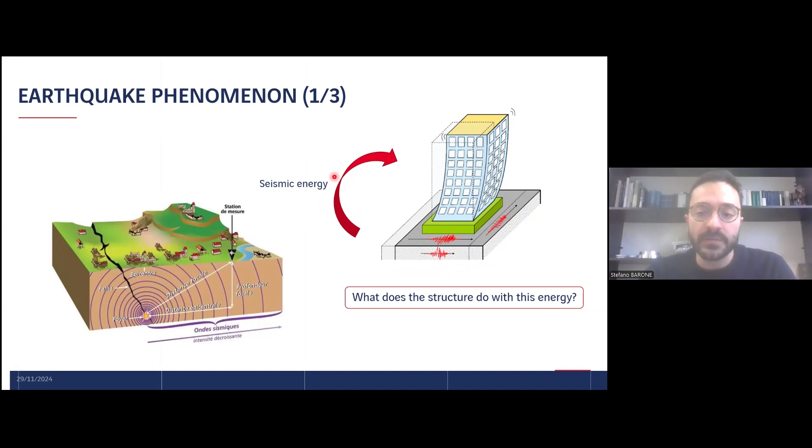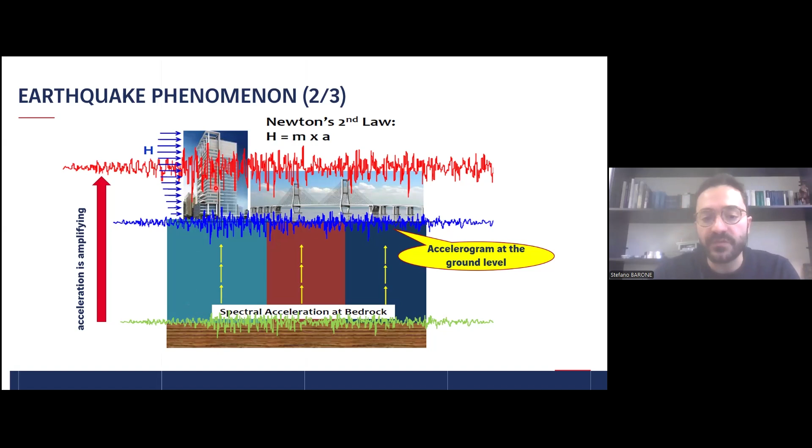Then, if we have a building or a structure that is fixed on the ground, this will be shaken by the earthquake, that is, in this case, the blue line. During the shaking, the seismic acceleration at the ground is amplified along the height of the building, along the height of the structure, as you can see here in the red line. So we move from the green signal to the red signal, and this is because typically the structure amplifies the seismic acceleration if it has a frequency or period of vibration that is close to the frequency content of the earthquake. So in the end, we have a sort of resonance phenomenon.

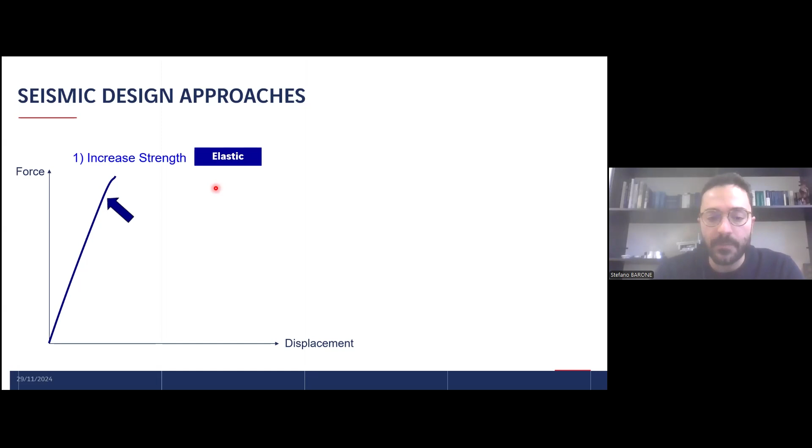The first seismic design approach is to design the structure to behave completely elastic. So the concept of this design strategy is to increase the strength of the structure as much as possible so that during the design earthquake, the structure will behave completely elastic. And so this is the elastic approach. Then we have the second approach, that is the elastoplastic approach, that is nowadays the most used method if we are in a medium to high seismic region, like, for example, Costa Rica. This is called the elastoplastic method.

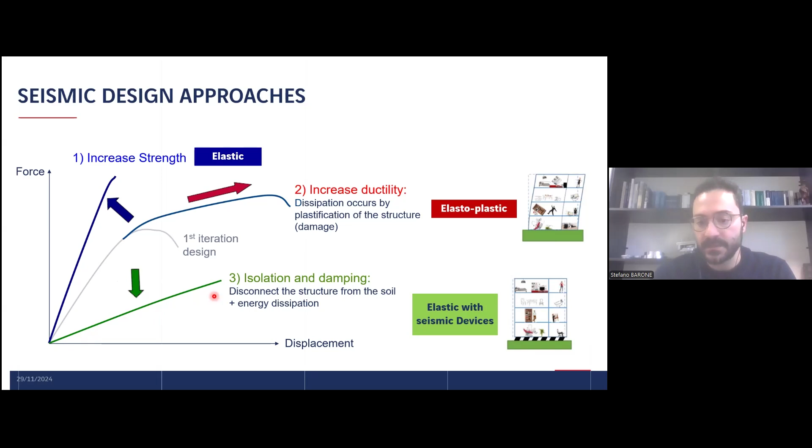And the second is that we can have the advantage of the elastic design. What does it mean? It means that the structure during the design earthquake will behave completely elastic. So this means no damage during a seismic event. So now we will go a bit more in detail into each design strategy before reaching seismic isolation and dissipation. So elastic design, as I mentioned, is the first design approach.

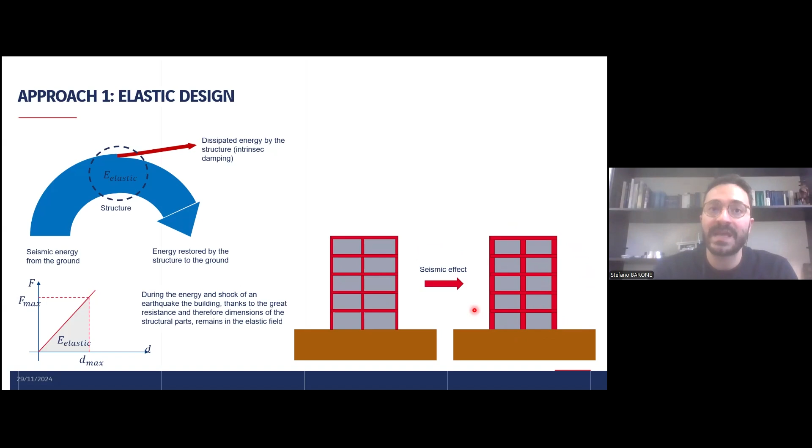And as I mentioned before, if we take a look at the lateral force displacement response, the structure will behave completely elastic. So what happens? For example, here we can see that if this is the building, designed just for gravity load, and we apply a seismic action, this is typically the effect of the application of an earthquake. So we need to increase, as I mentioned before, the strength and the dimensions of the structural elements in order to resist the seismic action elastically, without any damage.

So if we go to the main characteristics of this design strategy, first of all, the elastic design requires an important reinforcement of the structure, big structural components. Of course, this is a function of the type of structure and of the seismic zone. You can understand that the higher the seismicity, the higher will be the strength increment of all the structural elements.

The second characteristic of this strategy is that the structure is elastic during an earthquake. So this means that during an earthquake, we don't have any damage. The third characteristic, which is linked to the first point, is that typically an elastic structure requires a high initial manufacturing cost, because we need to increase the strength of the elements. If it is a reinforced concrete structure, we need to increase the quantity of reinforcement and so on. Of course, this is again a function of the type of structure and the seismicity.

So the question, after having analyzed the elastic design, is how we can reduce the size of the structural components and how we can reduce the initial construction cost, because these two seem to be the critical points of the elastic design. And that's why, for many years, we have had the ductile design.

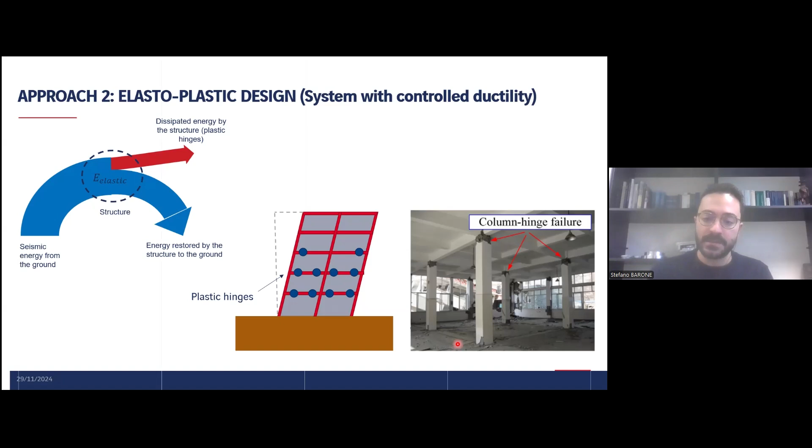So if we go to the main characteristics of this design strategy, first of all, thanks to the dissipation of the seismic energy, we can reduce the design seismic force to be applied on the structure. And this is the reason why, thanks to the ductile design, and it is the first point, we can reduce the dimension of the structural components with respect to the elastic design. So we have solved the first critical point of the elastic design, reducing the initial manufacturing cost of the structure. The second point is that during an earthquake, we have dissipation of seismic energy.

So we allow structural damage, and I would say also non-structural damage. As a consequence of this point, a ductile system typically is not serviceable after a seismic event. It cannot be used because you can understand here that we have damage. So before using the building after an earthquake, we need to retrofit the structure. And consequently, we have to take into account all the repairing costs of the structural and non-structural elements.

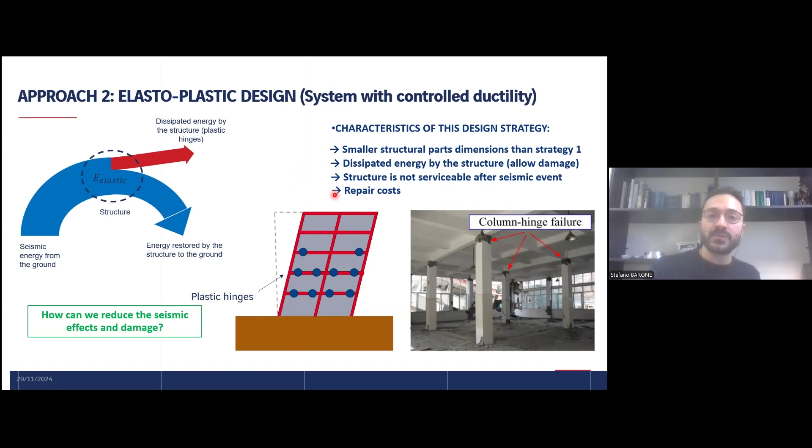So now, having analyzed a ductile system, the new question is how we can reduce the damage, so how we can reduce the seismic effects on the structure. And this is the reason why nowadays, I would say now it's more than 40-50 years, we can use this technology. Here we have the third design strategy, the one with seismic devices.

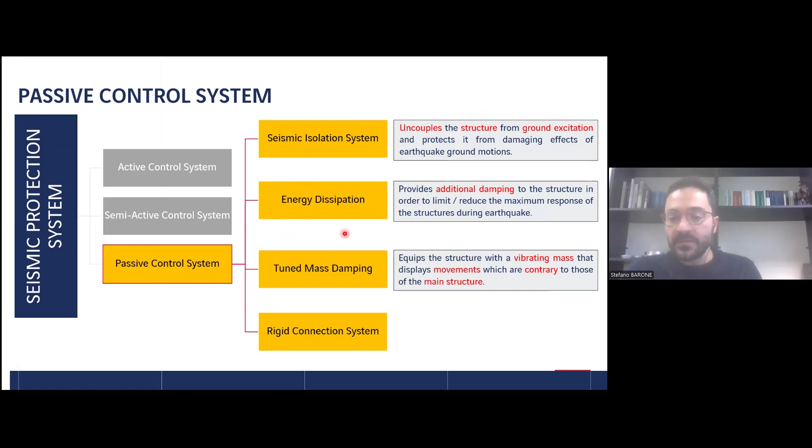Depending on the standard that you use, but typically for each family of product, for each system, you will find a description. For example, what is a seismic isolation system? It is a system that uncouples the structure from the ground excitation and protects it from the damaging effects of earthquake ground motion. What is an energy dissipator? An energy dissipator provides additional damping to the structure in order to reduce the maximum response of the structure during an earthquake. Then we have the tuned mass dampers, which are essentially masses installed in the structure to vibrate with a contrary movement with respect to that of the structure, like, for example, the mass that is installed on the top of the

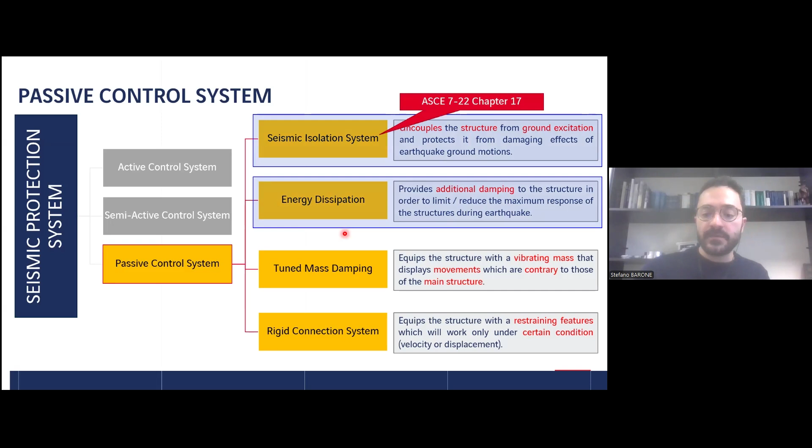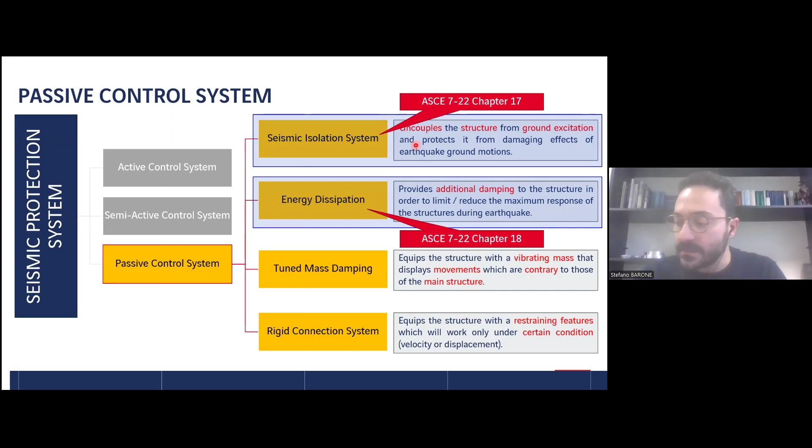Taipei building. And finally, we have the rigid connection systems, also called lock-up devices or shock transmission units. They are like a rigid link used to connect two points of the structure very rigidly during an event characterized by a high velocity. It could be an earthquake, a wind load, or a braking load. Then, depending on the standard that we use, we have a dedicated chapter. For example, in the American standard for buildings, ASCE 7-22, Chapter 17 is dedicated to seismic isolation systems, and Chapter 18 is dedicated to energy dissipators.

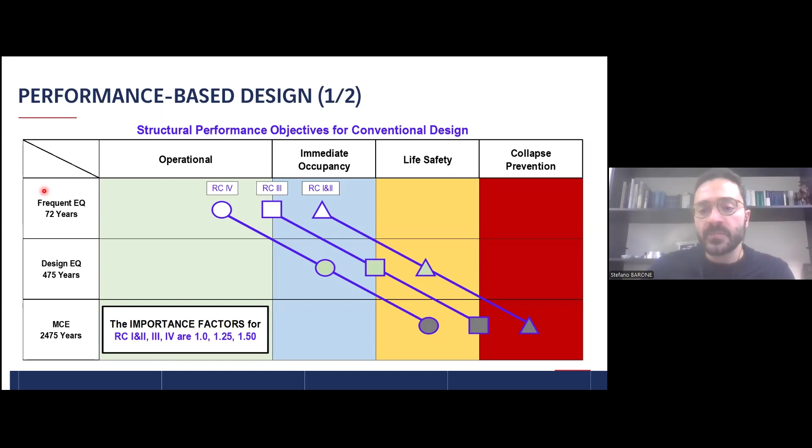So now let's see what happens in case of an isolated building, or in general in case of a building that is seismically isolated. This table is taken again from the American standard for buildings, and for example, now we can see an interesting fact. The first one, we can see that typically an isolated building is designed with the maximum level of performances.

So you can see now that for the maximum considered earthquake, if the structure is isolated, we prevent collapse, we protect the life, but we are able to design the structure to be used immediately after a seismic event. And of course, for all the lower intensity earthquakes, we can satisfy the operational limit state. So the first important result is that if the structure is isolated, we can reach the maximum possible performance.

And the second point, you can see here that now all the types of buildings are grouped in the same line. So whatever is your structure, a private apartment, a suspended bridge, a hospital, if the structure is isolated, we can design the structure with the same level of performance. In fact, in the American standard for building, but this is the same for all the standards, all the seismic codes, if the structure is isolated, the importance factor is kept equal to 1 for all risk categories. So it means now that we can design from the private apartment to the hospital with the same level of performance.

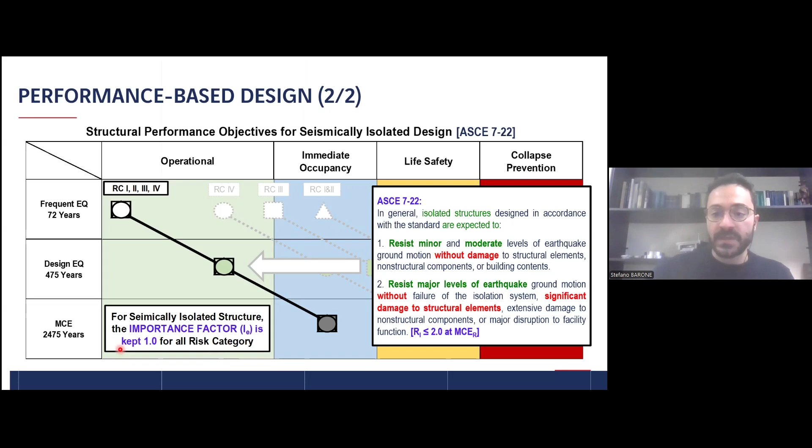And in fact, if we take a look at what the American standards say for isolated structures, this concept that is in the table is very clear also in the sentence, because we can read together ASCE 7-22 says that in general, isolated structures designed in accordance with the standard are expected to, first point, resist minor and moderate levels of earthquake ground motion without damage to structural elements, non-structural components, or building contents. So, by the way, another important point, you not only protect the structure from, let's say, structural damage, but with seismic isolation, you are able to protect also the non-structural components, and we will see why, and also the building content. So imagine, for example, if you have particular equipment that is installed in the structure. And the second characteristic is that an isolated structure is designed to resist major levels of earthquake ground motion without failure of the isolation system and without significant damage to structural elements, extensive damage to non-structural components, or major disruption to facility function.

So now, in this video, we can see how the same building with and without isolation will behave during an earthquake. So here you can see, for example, that typically a structure without isolation will start to deform during an earthquake, and here you can see the deformation of the building along the height, the famous interstory drift, while the same structure isolated will behave in this way. So you can see now that the structure that is supported by the isolator during an earthquake will move like a rigid block, like a rigid body. And the main advantage of this is that if we take a look at the stories of the building, the relative deformation, the interstory drift, is reduced a lot. And this is the reason why during an earthquake we reduce damage to the non-structural components.

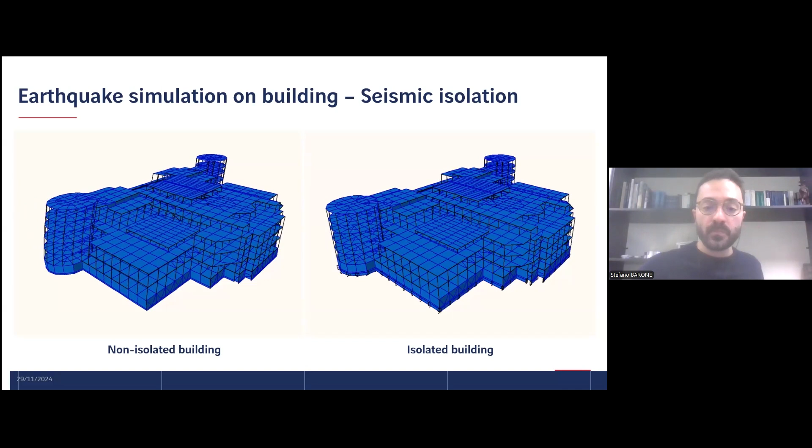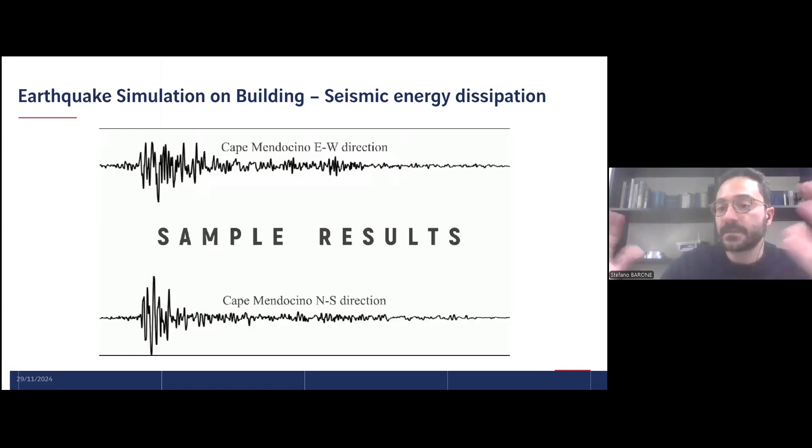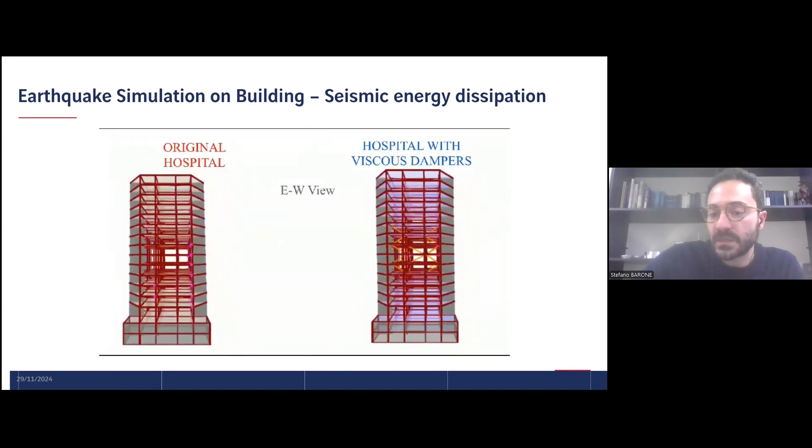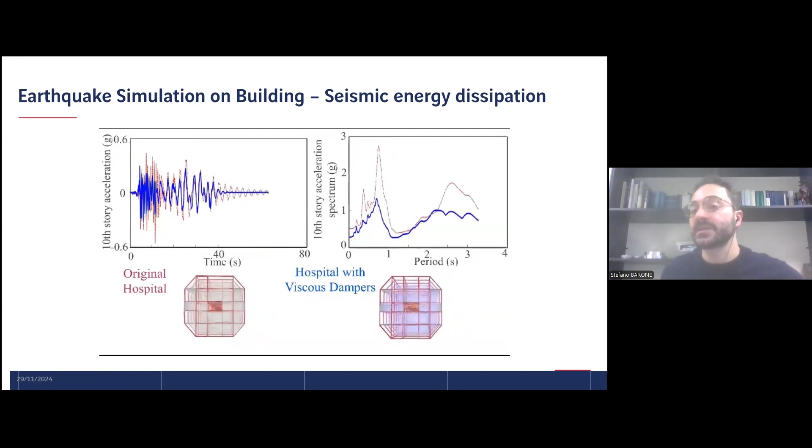And finally, if we take a look, for example, at the acceleration on the last floor of the building, on the left side, we have the acceleration over time, and on the right side, we have the floor acceleration against the period. You can see the beneficial effect of using a fluid damper. In other words, a fluid damper is also capable of reducing the accelerations at the last floor of the building.

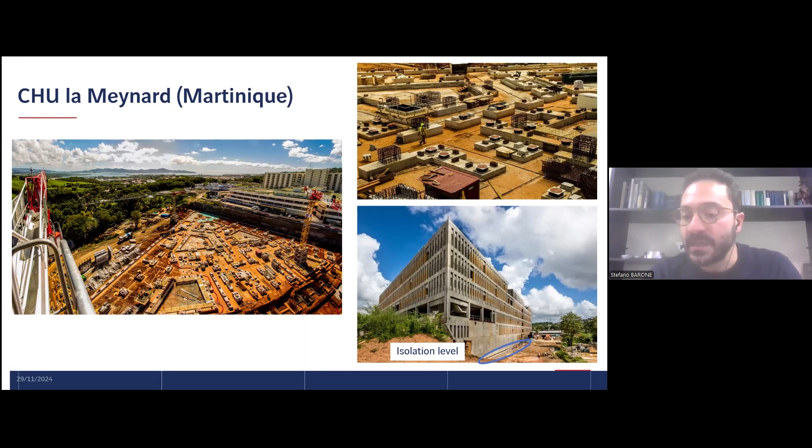and this is typical of isolated buildings, because as we saw before, the building during an earthquake has to move. Because it is isolated, you need to create a gap all around the building that is essentially equal to the displacement demand of the isolator.

So now we go a bit on the definition of the response spectrum. I will go a bit fast on this part because I imagine that you are all familiar with the concept of response spectrum, but I just want to tell you that the response spectrum is a powerful tool that is used not only for conventional buildings, but also for isolated buildings. And for an isolated structure, the concept of single degree of freedom, and so the concept of response spectrum, is very important, very interesting.

Because why? Because typically, if the isolated structure is well designed, during an earthquake it behaves essentially like a single degree of freedom system. So imagine that an isolated structure during an earthquake is like a mass that is supported by a certain spring with a certain damping. So it's a concept that is very, very useful, and you can easily pre-design an isolated structure with a response spectrum.

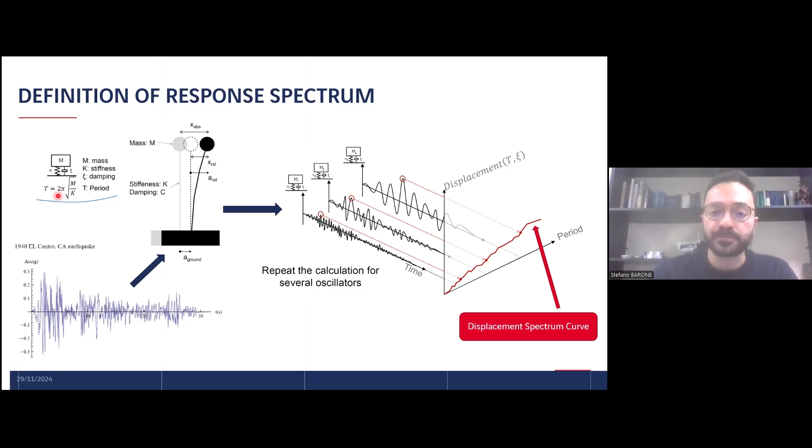So the first concept that we can see is that if in some way we increase the damping in the structure, the effect of damping is to decrease acceleration and mainly displacement. And this is one concept of seismic isolation and energy dissipation. So the first concept is to introduce damping, in this case with specific devices that could be isolators or dampers, in order to decrease acceleration and displacement.

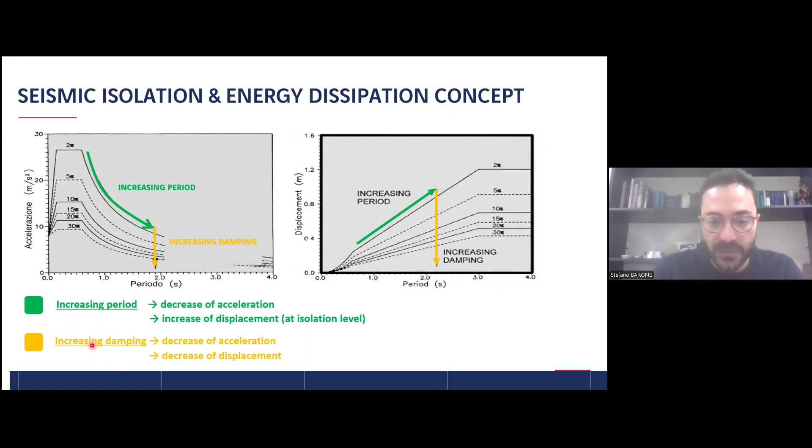So if the structure has a period that is in the region of maximum amplification of the seismic acceleration, it is a good candidate for an isolated structure. An isolated structure typically has a period that goes from 2 seconds to 4, 5, 6 seconds. This is the typical isolation period

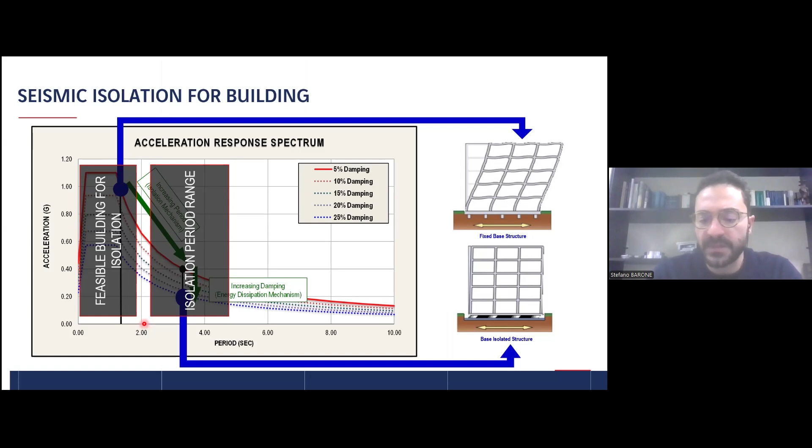range. Here I show you a nice example. It's more of an academic example, but it shows you how a structure can be designed with different solutions. Every time that we want to design a structure, we can think of different strategies. The final answer will be to find a solution that is a good balance between the cost of the solution itself and the performances.

So, for example, in this example, we have a classic portal frame. Let's assume, for example, a period of 1 second and a damping of 5%. And the same portal frame is analyzed with a diagonal damper and with a base isolation level, as well with a damper. So now let's assume we take all these structures and shake them with the same earthquake, in this case, the El Centro accelerogram.

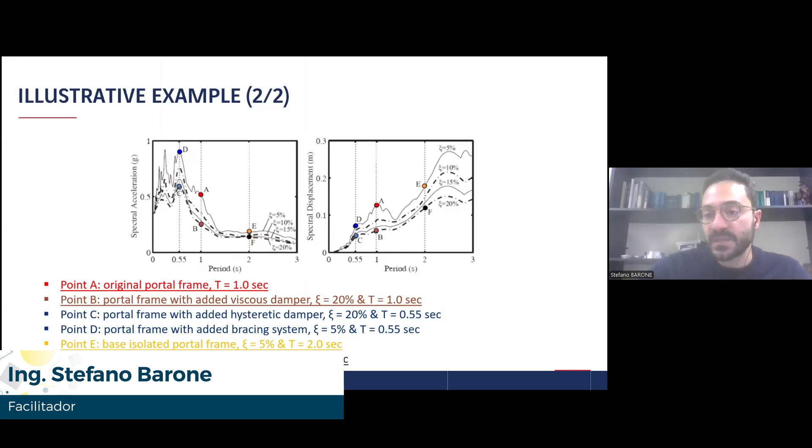And now, what happens if we take a look at the isolated solutions? For example, point E represents a portal frame with isolators at the basement without any modification of the damping. This is, as I mentioned before, a more academic example, because typically isolators also introduce a certain level of damping. But let's assume, just to increase the period, in this case to 2 seconds, without modifying the damping of the system. So the damping is kept at 5%. You can see that by doubling the period from 1 second to 2 seconds, we are able to reduce the acceleration from 0.5 g to almost 0.2 g. So you can see how beneficial the period elongation is, so the seismic isolation effect.

And now, the last point that is also interesting: what happens if we introduce also an isolator with a certain level of damping, for example, 20%? We can see an interesting thing. In terms of acceleration, we move from point E to point F. So you can see that if I have a damping of 5% or a damping of 20%, the acceleration reduction is not so important. Why? Because thanks to the period elongation, in this case 2 seconds, we are already in a range of periods where the earthquake does not excite my structure too much. So if I have 5%, 10%, 15% or 20% damping, more or less the response is the same in terms of acceleration. Yes, there is a small reduction, but it's negligible.

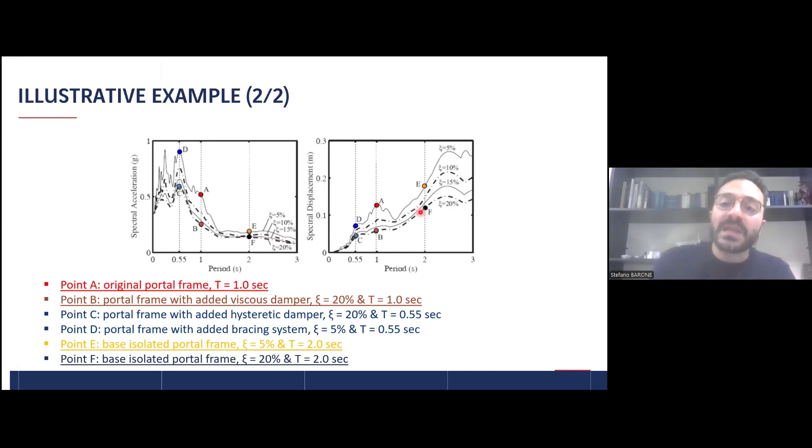The main advantage of introducing the damping, as I mentioned before, is in the displacement of the isolator, because now, without damping, I would need to design the isolator, for example, for a displacement level of 200 millimeters. While with 20% damping, now I can design the isolator with a displacement of 120 millimeters. So in the end, this means a smaller device that is also more economical. So the concept is that by introducing a certain level of damping, we will help the isolators in reducing their response.

And here in this slide, you can see a recap of the typical positioning of the seismic devices. For example, in buildings, typically the isolators are installed at the basement. Sometimes they are installed at level 0, sometimes at level 1, level +1, but in general they are installed at the base. If we have a flexible building,

another solution, instead of isolating the structure, could be to install some diagonal braces in the structure, and the diagonal could be equipped with a viscous damper or a hysteretic damper. In the case of bridges and viaducts, typically the devices are installed between the pier and the deck, and sometimes they can also be installed between the abutments and the deck.

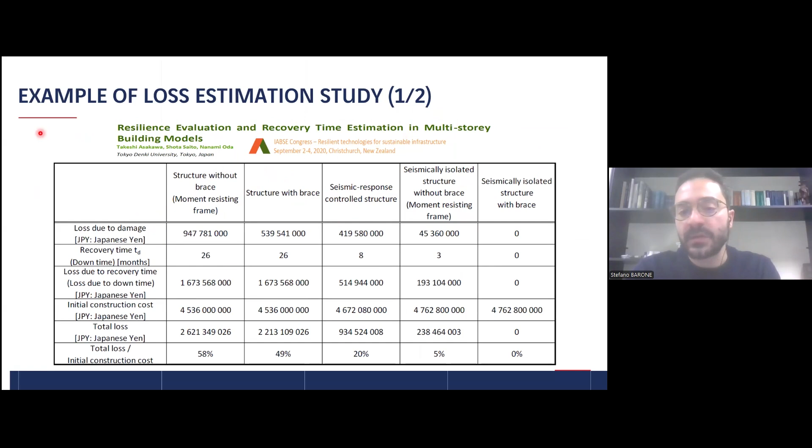And here, going to the conclusion of this presentation, you can see an interesting study that was done by Tokyo Denki University. This is the paper that you can freely download from the website. What they did was to analyze 5 different types of structures with different structural configurations. For example, here you have a steel moment frame and a steel frame with diagonals designed for ductility. And then we have 3 different systems designed with different types of devices.

In this case, the structure is equipped with viscous dampers, the green line. In this case, the structure is isolated at the base. And finally, a structure that is isolated at the base with a system of diagonal braces. What they did was to calculate, for each of these structures, different parameters that are listed here. The first parameter that they calculated is the loss due to damage. Everything is expressed in Japanese yen, but it's important to observe the magnitude.

The loss due to damage is the money that you have to spend after an earthquake if you have damage in the structure. You can see that if the structure is designed as a ductile system, as I mentioned at the beginning of this presentation, it means damage during an earthquake. And in fact, you can see the level of money that you have to spend due to the seismic damage. While if we start to protect our structure with specific devices, we can reduce this cost a lot, almost to zero, exactly to zero. Zero means that during the earthquake, the structure will not suffer any damage, so after the earthquake you don't have any retrofitting cost.

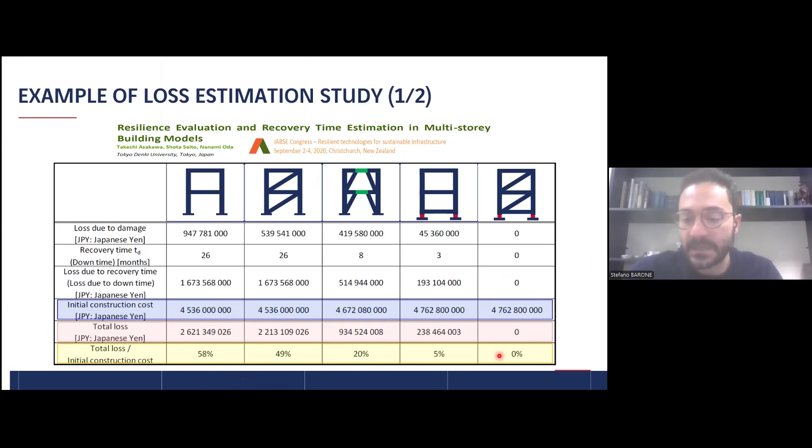So this is the reason why, if a structure designed for ductility is damaged by the maximum considered earthquake, it could be more convenient to demolish the building and build it again, because the cost that you have to sustain to retrofit the building is very, very high. While if the structure is protected, this ratio could be very low and even exactly equal to zero. So it means that you don't have to spend anything after the earthquake.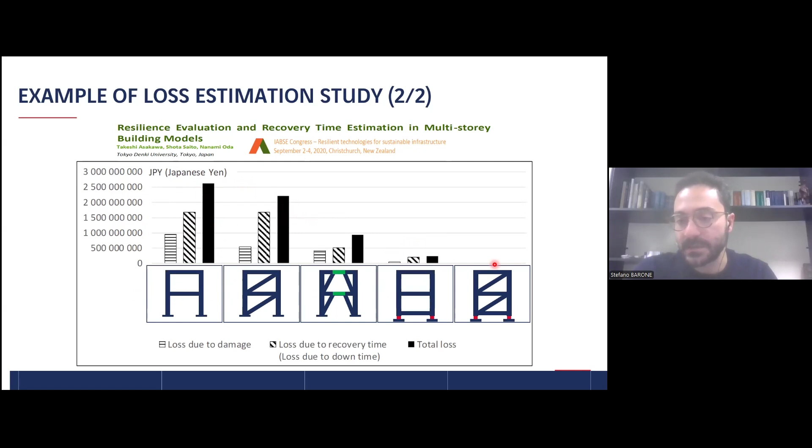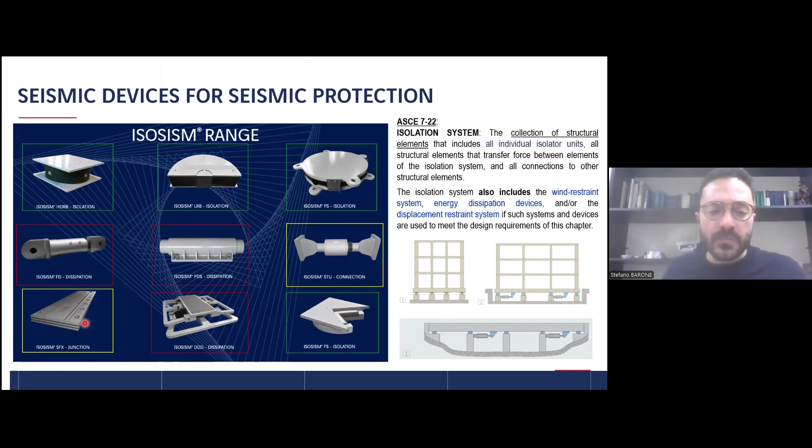Then we have the shock transmission unit, so the rigid connector, and of course the seismic joint, because as you know, if we are isolating a bridge, then we need to install also a seismic joint that has to follow the movement of the isolator. So with this presentation, we are a bit in delay, but let's say we end the first part of the presentation. Before introducing the second part, that is more on the seismic analysis, we can answer some questions that you may have.

Okay, Pablo is asking, what is the useful life of the devices shown in the videos? Let's say that the useful life of a device depends on the type of device, and of course on the environment, so where the device is installed. So if it is installed under a bridge, or if it is inside a building, and so on, I would say that on average we go from a minimum of 40 years to 60 years. So this is typically the nominal life.

Nominal life means that it is a period in which, by just doing a regular inspection and maintenance of the device, it can work safely, so it does not need to be replaced. After this period, we suggest to take one device to test it, to see how the performance changed over the years, and to understand if we need to replace the devices or if the device can still be used in the building.

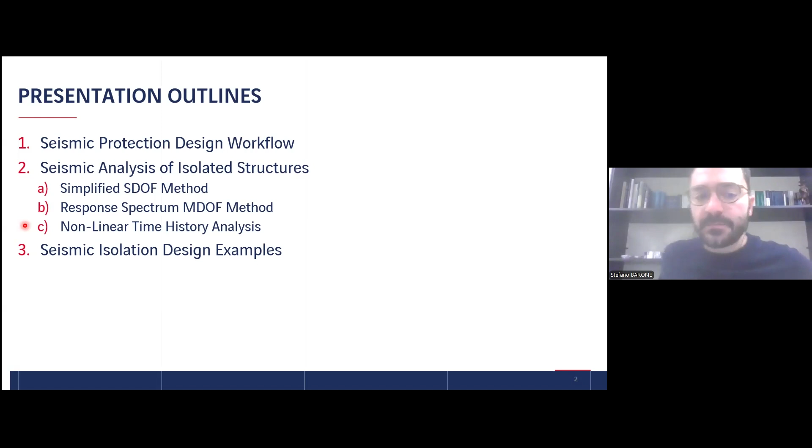So we start with the typical seismic protection design workflow. Then we will see different seismic analysis methods that can be used for isolated structures. And finally, I think this is the most important part, we will see some seismic isolation design example.

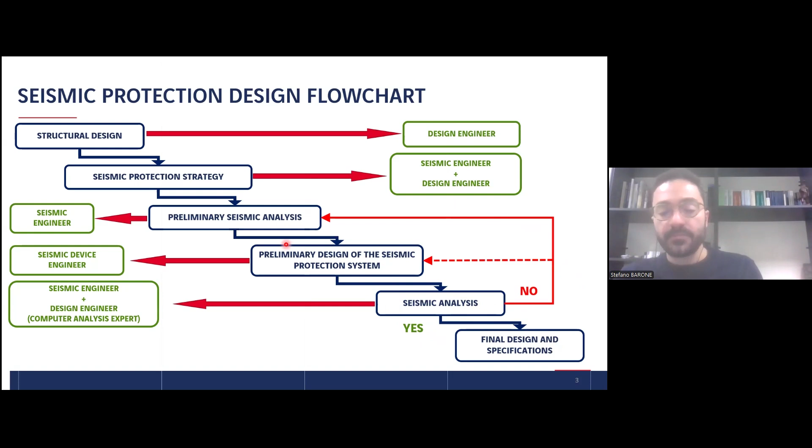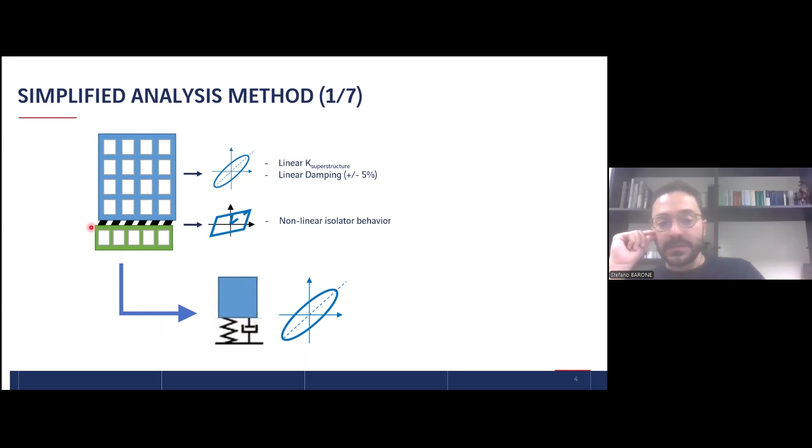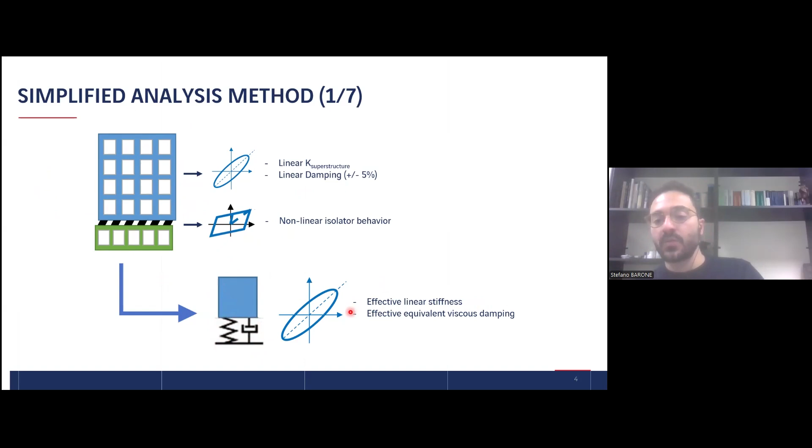So it means that I can imagine the superstructure with a linear behavior, so a linear stiffness and a linear damping. So how can I model this system, this building? In a simplified way, because here we are talking about simplified analysis methods, we can reduce our system to a single degree of freedom system, like I mentioned before, where we have a certain mass, typically the mass of the superstructure, that is supported by a certain stiffness and with a certain damping. So this is what we actually do with the simplified analysis method. We reduce our 3D system to a single degree of freedom system, where at the base we have an effective linear stiffness that represents the stiffness of the isolator with an effective equivalent viscous damping. And this is, as I mentioned to you, the single degree of freedom system.

So, for example, what happens if I have a bridge? Let's assume that you have a bridge, 2 piers, 2 abutments, and the deck is isolated. So the bridge is isolated. So this is the typical behavior of the isolator. So the isolator will have a nonlinear behavior. And then I have the substructure.

Typically, if the bridge is isolated, I design the abutments and the piers to behave elastically. So for the substructure, I can consider to have a linear stiffness and a linear damping. Again, if I want to preliminarily analyze my isolated bridge with a simplified method, what I do is to represent this, actually my bridge, the model of the bridge, no?

Where in every support I have a stiffness and a damping that is a combination of the isolator and the supporting system. And then I can reduce my global system again to a single degree of freedom system with a certain effective linear stiffness and effective equivalent damping. So the strategy is the same, to reduce my building to a single degree of freedom system with certain characteristics.

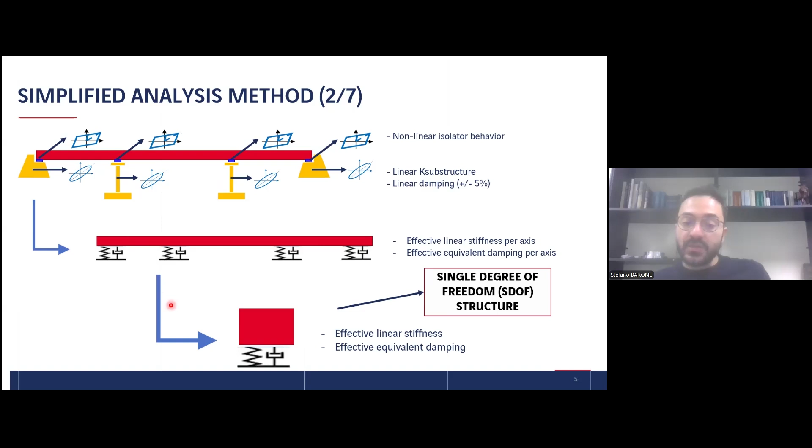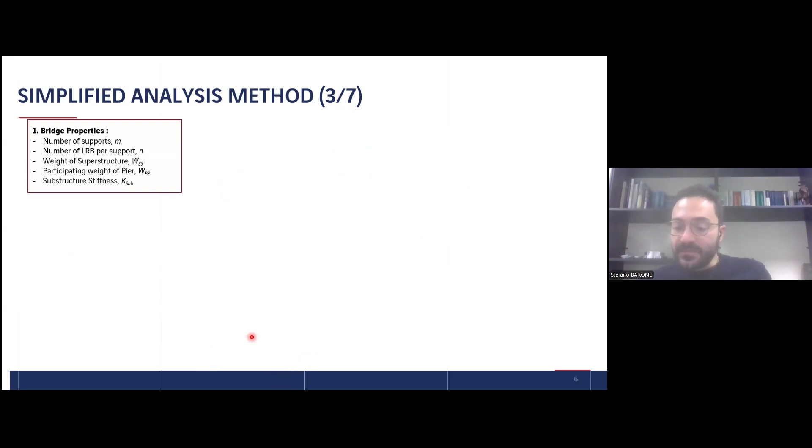So now we will see the main steps to analyze an isolated bridge and to reduce it to a single degree of freedom system. And you can see from this flow chart that it can be easily implemented in a simple Excel file. So the first step is to define the bridge properties, no? So I need to know the number of supports, for example, the number of isolators per support. So in this case, we are considering lead rubber bearings, but it could be a different

device. We need to know approximately what is the weight of the deck. We need to have an estimation also of the participating weight of the pier. This fraction can be determined depending on the shape of the pier. And we need to have an estimation also of the substructure stiffness that in an initial phase could be neglected. Then the second step will be to determine, of course, the seismic hazard criteria, so to characterize the seismicity of the site, essentially the spectral acceleration, the acceleration spectrum and the displacement spectrum for different levels of damping.

Then I need to select the initial basic parameters of my isolators. In case of lead rubber bearings, I need to select, for example, from a catalog, the characteristic strength and the post-yield stiffness. These are the two main parameters that characterize a lead rubber bearing. Then step 4, as we saw before, we have a system of isolators that are supported by the pier. So I need to calculate the effective stiffness of the combined pier and isolation system.

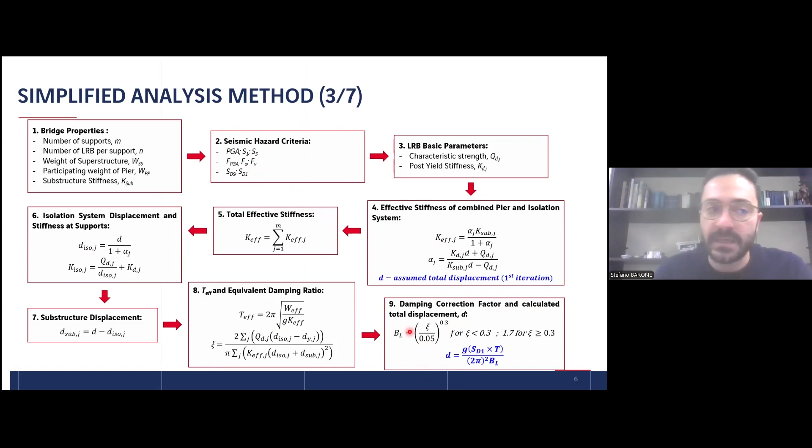If this displacement, and this is typically what happens, is different from the one that I have used in the step before, I need to do a second iteration and repeat all the steps. Typically in 2-3 iterations, I reach full convergence.

So, for example, this is a case study. Let's imagine that we have a bridge with a superstructure that is supported by 2 abutments and a pier. The abutments are typically very rigid, so we can assume that the lateral stiffness is like 10,000 kilonewton per millimeter, just to say that they are very rigid. The pier, we can calculate the lateral stiffness of the pier, depending on the height, depending on the section. And we can calculate also the weight of the superstructure.

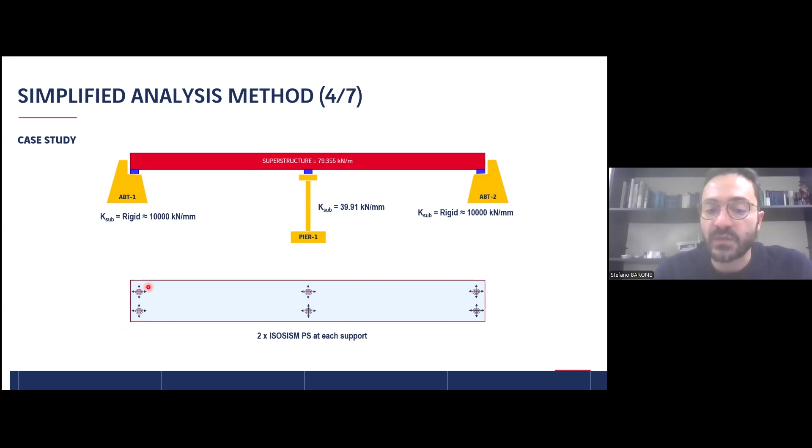So now let's imagine that we want to isolate our deck with 2 friction isolators at each support, 2 pendulum systems. The pendulum system you can see here is the one that we saw in the video at the beginning, so it's made by 2 sliding plates. If you imagine deforming it laterally, this is the typical horizontal force displacement response of the friction isolator. The friction isolator is locked up to the friction force, that is simply the friction coefficient times the vertical load. Once the earthquake action exceeds the friction force, the isolator will start to deform with a stiffness that is simply the ratio of the vertical load over R, where R is the radius of curvature of the isolator.

So what we have to do is actually, let's say this picture, which is actually taken from AASHTO. Imagine that we have our deck that is supported by an isolator that is supported by a pier. The isolator is characterized by a certain force displacement loop. Our substructure is characterized by a linear behavior. Why linear behavior? Because if I am isolating the structure, I want the pier to behave elastically during an earthquake. And so in the end, the isolator and the supporting pier, these 2 systems are in series, so I can calculate the combined effective response of the system.

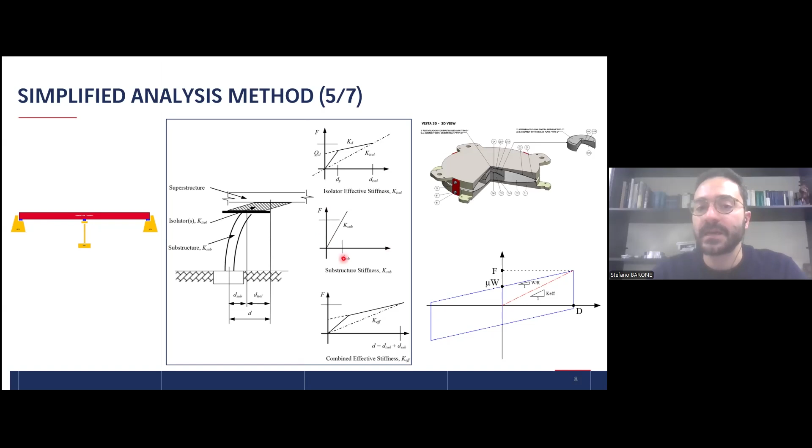And then we can calculate the friction, the QD of the isolator, that is the friction force, and the lateral stiffness. And again, we can immediately calculate this parameter because the QD is just the friction coefficient that we selected, we assumed, times the vertical load that we know. And the lateral stiffness is just the ratio between the vertical load over the radius of curvature. That again is an input parameter. So we can immediately calculate the characteristics of the isolator at each support.

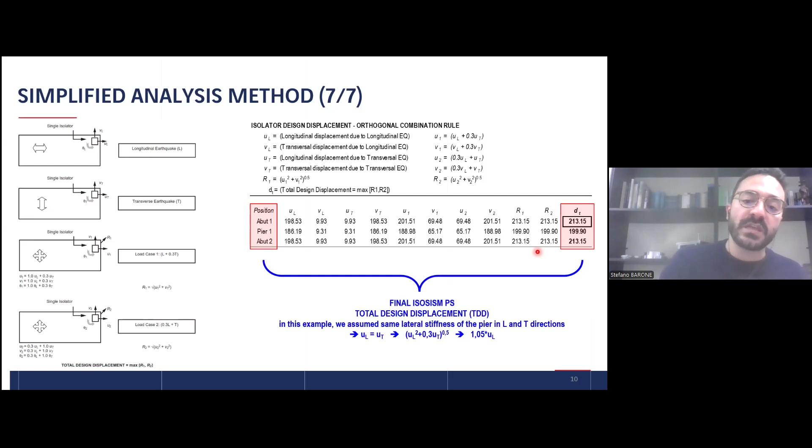An important thing is that when we analyze a bridge, but it's the same for a building, imagine that, for example, this picture is taken from AASHTO. If we imagine to apply the earthquake in the longitudinal direction, our single isolator will have not only a longitudinal displacement, but will have also a transversal displacement. And again, if I apply the earthquake in the transversal direction, my isolator will deform in both horizontal, longitudinal, and transversal direction. So this is the famous 100%, 30% rule that is given in most of the standards, like, for example, AASHTO or the Eurocode, that essentially will tell you that if I want to combine the effect of the earthquake in the two directions, I can take 100% in one direction and I combine it with the 30% of the effect when the earthquake is applied in the other direction.

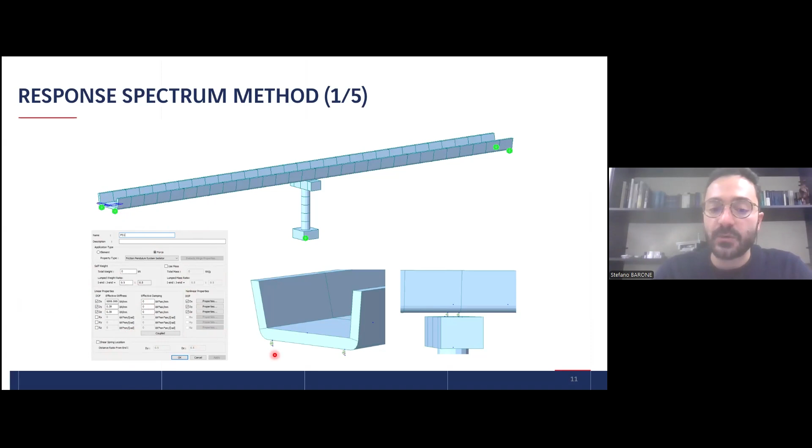The other method that we can use to analyze a structure is the response spectrum method. With the response spectrum method, what we do is to model the entire bridge. This is the same bridge that we analyzed before with the Excel file. So now with the response spectrum method, we have to model the entire 3D bridge in the software. And here you can see we need to define the characteristics, the link properties of the isolator, between the deck and the pier.

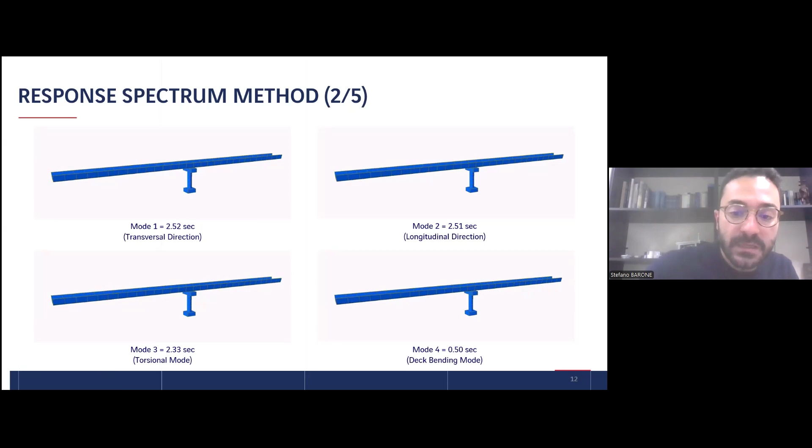What does it mean, isolation mode? It means that they are modes of vibration in which the isolators are deforming. But for example, mode 4 is not an isolated mode, it's a local deck bending mode of vibration. In fact, it has, for example, a period of 0.5 seconds. So what does it mean? It means that the software, typically, depending on the modes of vibration, will use a different level of damping, and so will modify the spectrum with different levels of damping.

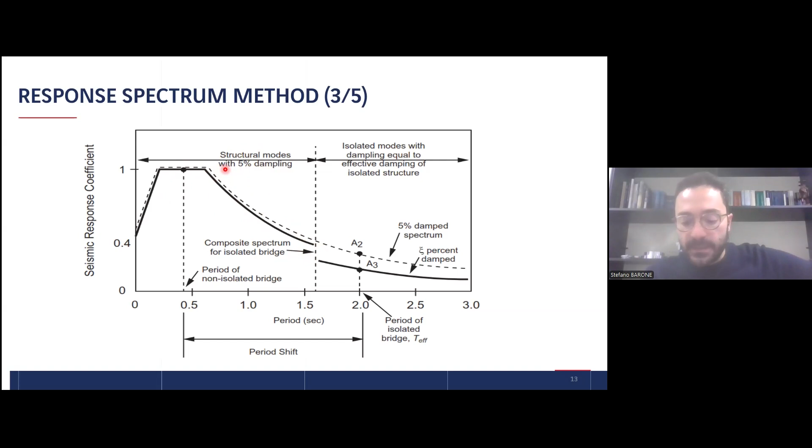So for example, this is the so-called composite spectrum for isolated bridge. Essentially, for all the modes of vibration where the isolators are deforming, so they are isolated modes, the software will use the damping of the isolation system. While for all the modes of vibration where the isolators are not involved, the structural modes, like for example, the modes of vibration of the deck, then the software will use a spectrum with no damping, or just with the elastic damping of 5%. So this is the way the spectrum is used in a response spectrum analysis method.

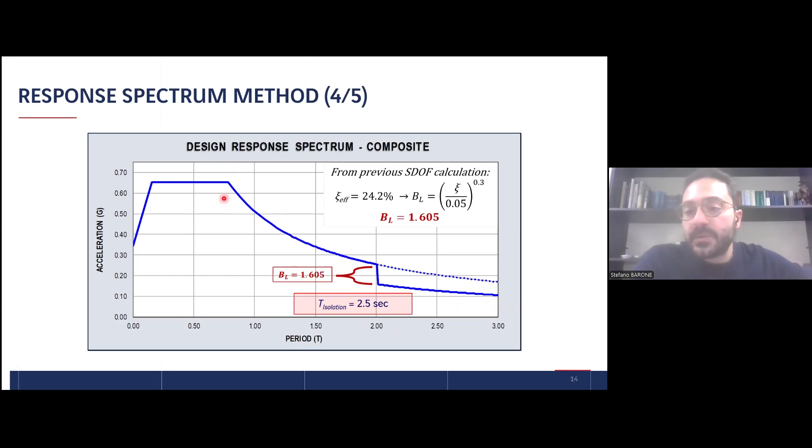And for example, this is the hybrid spectrum of the bridge. In this case, we had a period of vibration of 2.5 seconds. And so, for example, AASHTO tells you that for periods of vibration that are higher than 80% of the period of vibration, so in this case 2 seconds, we need to use the damping of the isolation system. For all the other modes of vibration, we don't have to introduce any damping because the isolators are not moving.

So you can see how much the single degree of freedom system analysis can predict very well the final response of the bridge. And so this tool can be used as a preliminary tool for the seismic analysis, for the seismic design of an isolated bridge and as well of an isolated building.

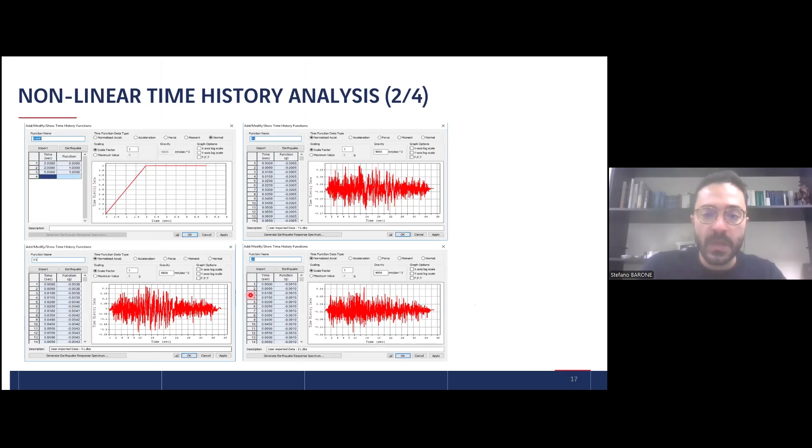Of course, when we perform a time history analysis, the most complete analysis is to apply two different accelerograms in the two horizontal directions, and also the accelerogram in the vertical direction, because the earthquake also acts in the vertical direction. So typically we have three components for the accelerograms.

And also, when we perform a time history analysis, typically before the application of the accelerograms, we apply the vertical loads, the dead loads, with a ramp function. This is useful because, thanks to an initial ramp function, we apply the vertical loads in a very slow way, so that the mass of the bridge is not excited before the application of the earthquake.

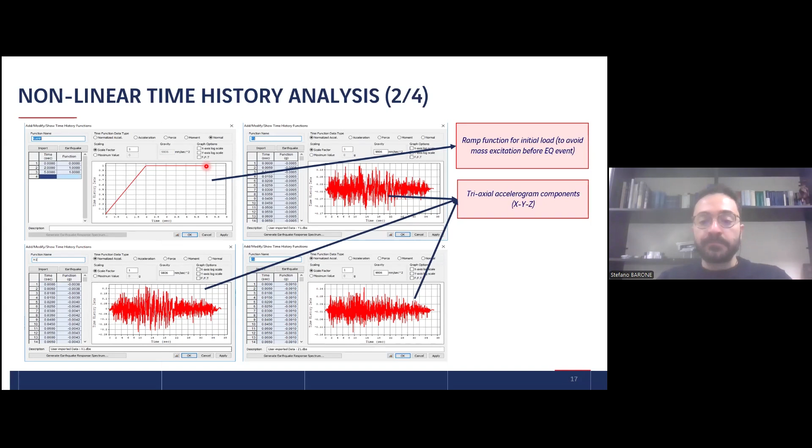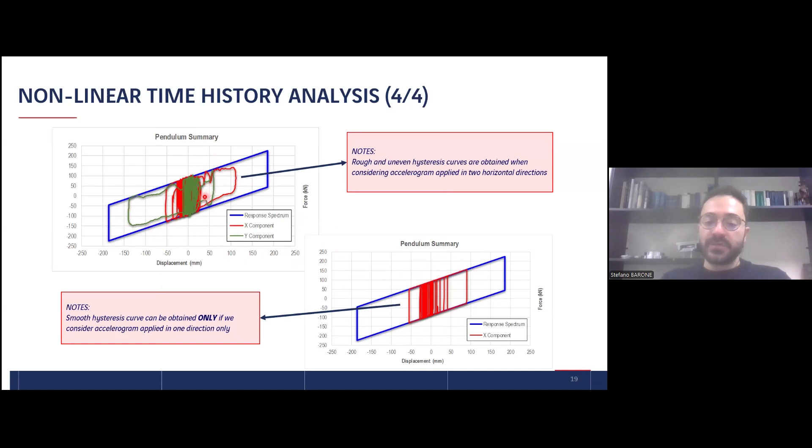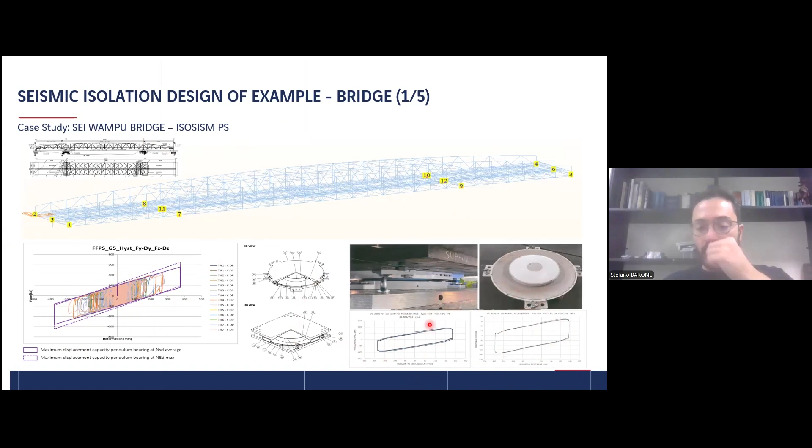For example, this is a real bridge. It's a truss bridge, a new truss bridge isolated in Indonesia, the Sei Wampu Bridge. This truss bridge is completely isolated at each support with the friction isolator. Here, for example, you can see the numerical response of the isolator for different accelerograms. And here you can see the experimental response, so the real response of the devices that were, in this case, tested in Italy.

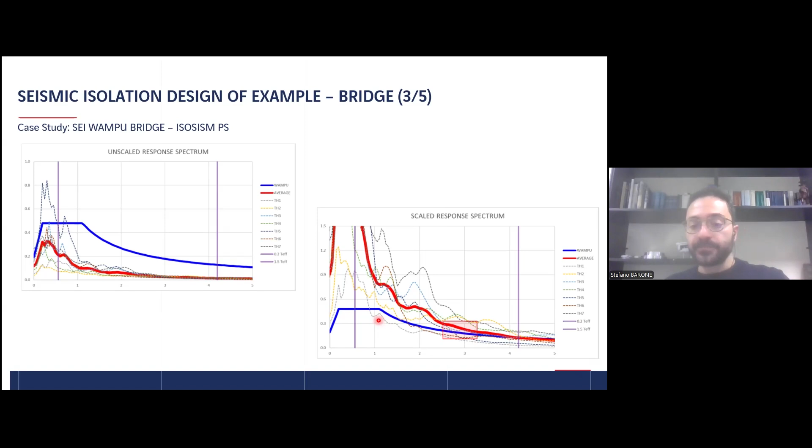This is an important piece of information that is difficult to have with a response spectrum analysis. And it is important because, for example, the friction isolator cannot resist any tension force. So it has to be compressed during the earthquake. So with the time history analysis, I can check that during the earthquake, there is no instant where the compression force goes to zero.

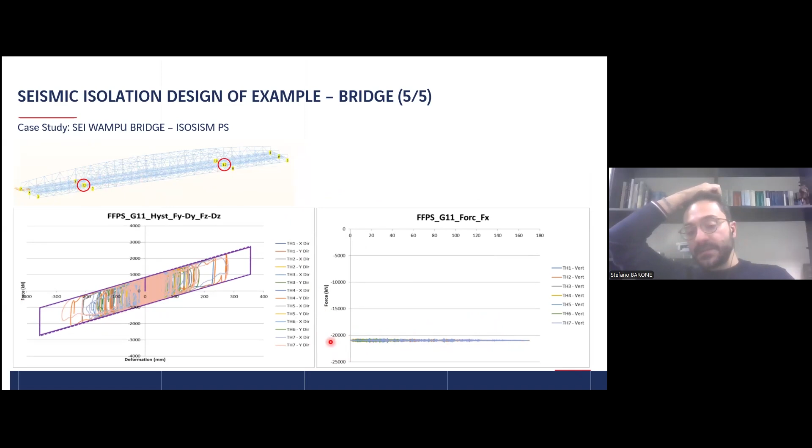And as well, if I take a look at the vertical force variation in the internal isolators, here again I can appreciate that the devices at the central piers are always compressed during the earthquake.

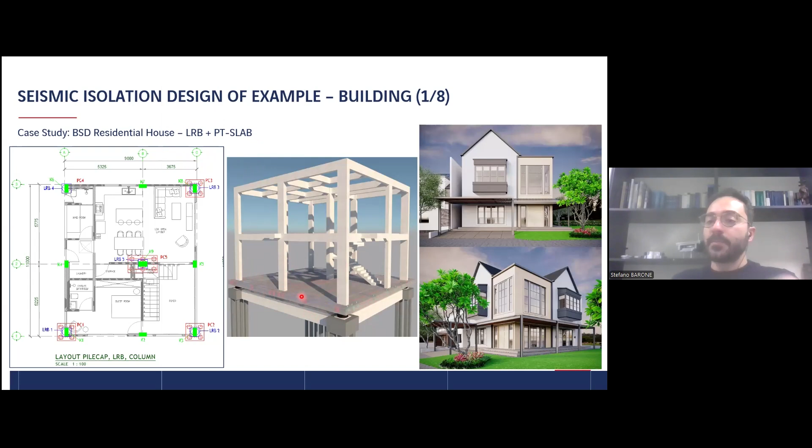So in this case, the isolators were, of course, located under all the columns. We use lead rubber bearings combined with a post-tensioned slab. At the basement of the building, we have a post-tensioned slab, and I will explain in a bit why a post-tensioned slab is a good solution that can be used in combination with seismic isolators.

So the design concept is a simple two-story reinforced concrete structure. We have used lead rubber bearings for seismic isolation. Why lead rubber bearings? Because in Indonesia, the level of earthquake is very important, so we need to dissipate an important amount of energy. And we have also used a post-tensioned slab. As I mentioned before, why a post-tensioned slab?

First of all, if I make the slab at the basement very rigid, the first advantage is that the post-tensioned slab will act as a rigid diaphragm above the isolation system. This is an important requirement every time that we have an isolation system. At the isolation level, we need a rigid diaphragm because this gives better dynamic behavior of the superstructure and allows an isolation system where all the isolators work in parallel.

And the second advantage of a post-tension slab is that I can reduce the number of required isolators, because I can make the spans bigger, and therefore I can reduce the number of supporting columns and consequently the number of isolators.

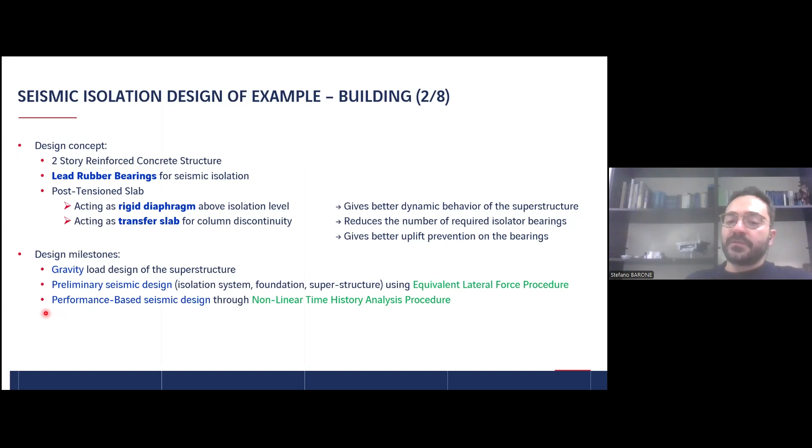Then, once the structure is preliminarily designed for the gravity load, we need to do the preliminary design of the isolation system and the foundation, and also refine the design of the superstructure. This can be done, for example, with an approximate method like the equivalent lateral force method, which is a simplification of the response spectrum method. Then, once the structure is preliminarily designed in terms of isolation system, foundation, and superstructure, I can perform a full nonlinear time history analysis in order to assess finally the real response of the structure.

In this case, we have used the Indonesian standard and the American standard for buildings, which, as I mentioned to you, is used not only in the United States, but also in other countries like, for example, Indonesia.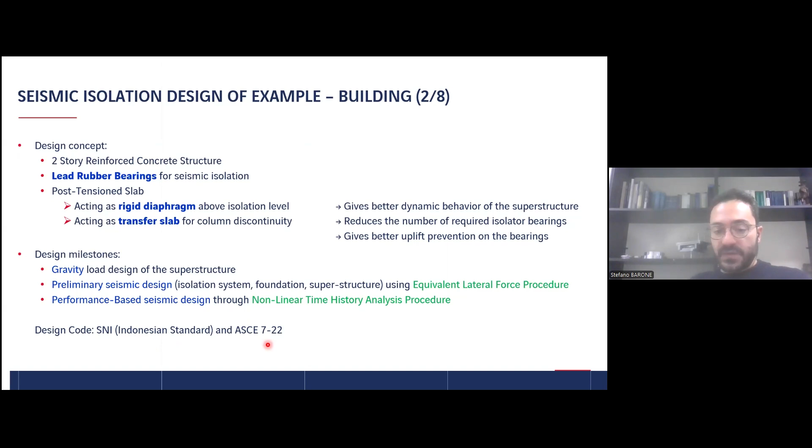So, 3D nonlinear analysis. An important concept to underline is that when we introduce the parameters of the selected isolators, think about the fact that the properties of the isolator are not fixed. They are variable, and they can change for many reasons: due to temperature effect, contamination, aging effect, production variability, and so on. So the main concept is that when the designer is analyzing the structure, it is good that the designer is in contact with the manufacturer, because the manufacturer can provide, depending on the isolator that is selected, the tolerances on the parameters.

And in fact, at the end, the designer needs to perform at least three types of analysis. One is called nominal bound analysis, the red line, which is an analysis with the nominal properties of the isolators. And then it has to perform a lower bound and an upper bound analysis. The lower bound is an analysis in which, in simple words, the properties of the isolators are reduced. So, for example, the strength and the stiffness are reduced. And this is the blue line.

And then the upper bound analysis, the green line, where the performance of the isolators is increased. So, for example, the characteristic strength is increased and also the stiffness is increased. So the designer will perform these three types of analysis to have a clear overview of what could be the response of the structure by taking into account the variations in the properties of the isolators.

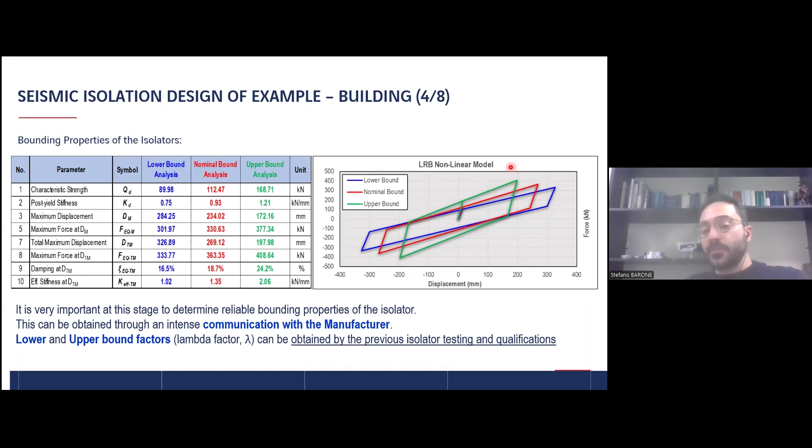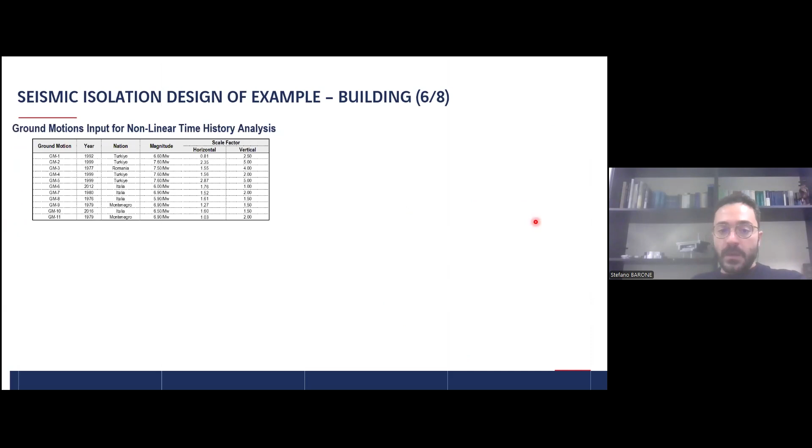As I mentioned to you, once we perform the time history analysis, we need to select a certain number of accelerograms, but then these accelerograms need to be factored, so they need to be modified, both the horizontal accelerograms and the vertical accelerograms, so that in the end the average of all the spectra, that is the blue line, is always equal or higher than the design spectrum, the target spectrum, that is the red one, for the period of interest.

In this case, the period of interest was from 0.39 seconds to 2.1 seconds for the horizontal direction, and for the vertical direction, the period of interest was from 0.1 to 0.50 seconds. So it means that in this range, I need to use accelerograms where the average of all the spectra, that is the blue line, is higher than the design spectrum, the target spectrum.

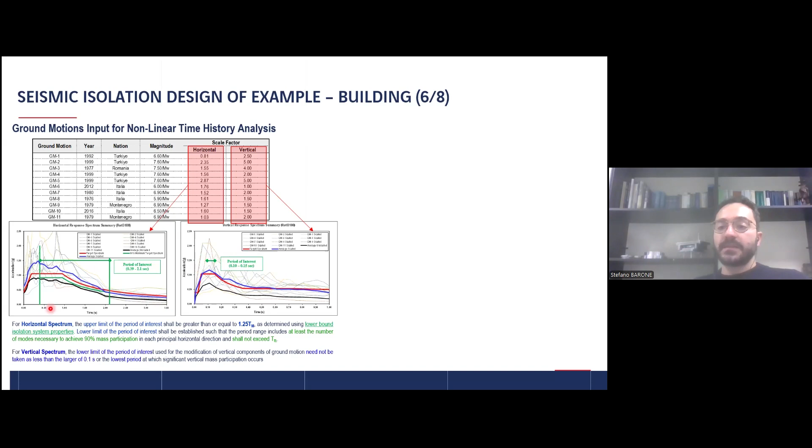And for example, each standard, in this case the American Standard for Building, typically gives you rules to define the period of interest in the horizontal and in the vertical direction. And then by applying the scaling factor, here we have all the set of accelerograms that can be used in our analysis, the two horizontal components and the vertical component.

So in the end, once we have defined all the characteristics of the structure, we can, for example, in order to validate the response of our building, so in order to check that in reality our building is behaving as expected. For example, we can think to model the frame, so each beam and column, with a fiber model, so we can implement exactly the nonlinear behavior of beam and column.

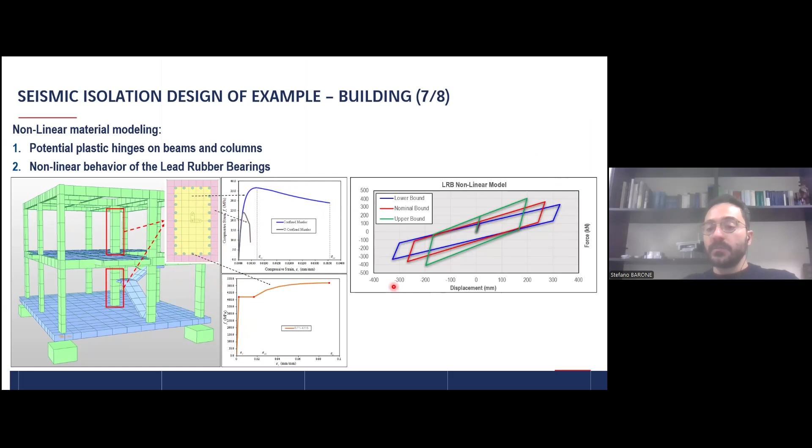So for example, here you can see the section of a column that is modeled with fibers, where we are modeling the behavior of the confined concrete. We are modeling the behavior of the unconfined concrete. We are also modeling the behavior of the steel bars, and also the nonlinear behavior of the isolator. Here you can see how the building is working.

So as I mentioned to you, this is, for example, how the building will behave without an isolation system, and this is how the same building will behave with an isolation system. So it will move like a rigid block. And here you can see, depending on the properties of the isolators, because as I mentioned to you, the characteristics of the isolator are not fixed. They can change because they are affected by many factors. Depending on the type of properties that I consider, the nominal properties, the lower properties, and the upper properties, you can see where I am in terms of spectral acceleration, and where I would be if the structure is not isolated.

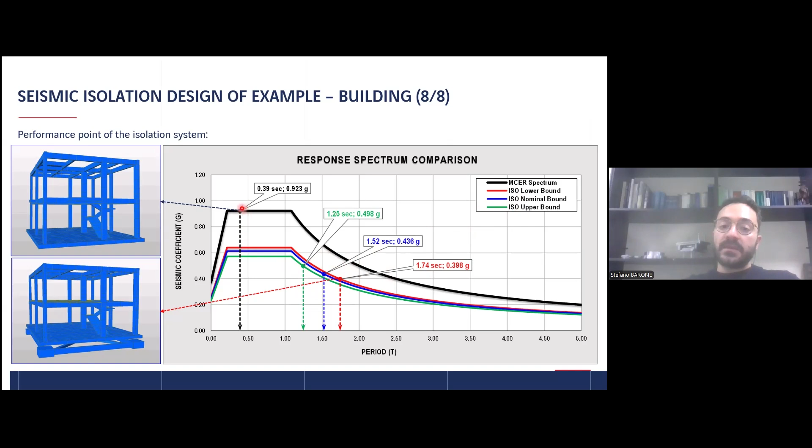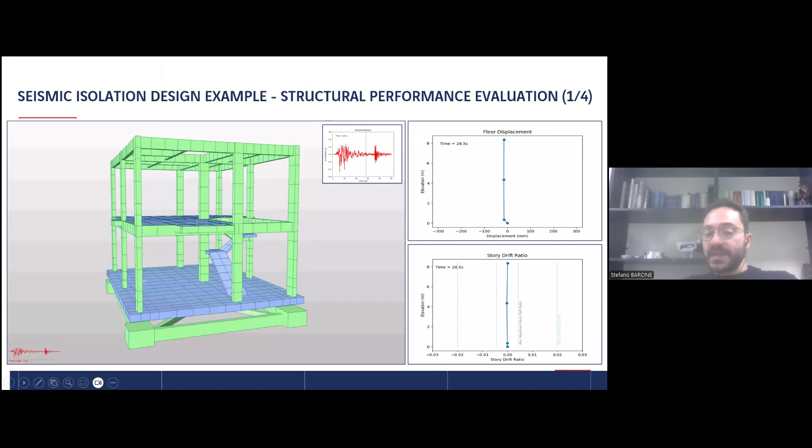So here, for example, in this slide, we can see the floor displacement of the isolated building. So you can see that the building is behaving like a rigid block. All the displacement is concentrated at the bottom, and below you can see the story drift. So the story drift is always very low. I think that we never exceed the 0.01 drift ratio during the whole earthquake. And this is because the structure is behaving like a rigid block.

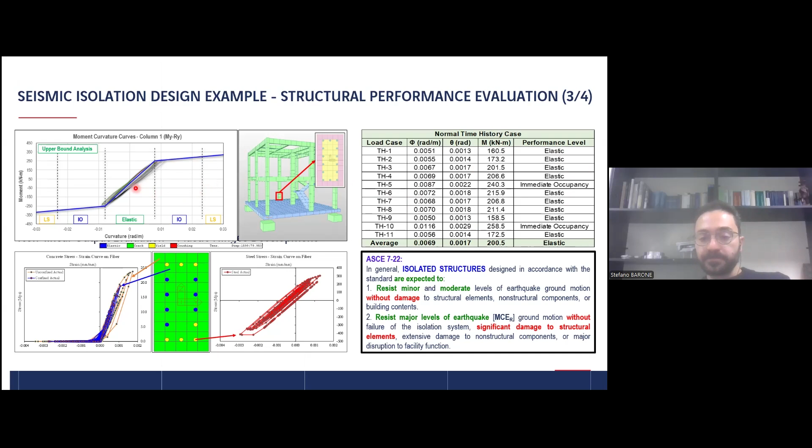Again, if we perform a time history analysis, for example, we can take one isolator and take a look at the vertical reaction of the isolator. Again, this is very important because the rubber isolators, compared to the friction isolator, have a certain tension resistance, but anyway, this tension resistance is very low. So with the time history analysis, we can see exactly for each time history what is the variation of the vertical load. As you can see here in this table, for each time history, we can take the maximum and the minimum value. And as I mentioned to you, if we perform at least 7 time history analysis, the standard allows us to take the average of the peaks as a design parameter. So in this case, for the design of this isolator, we will have to consider a maximum compression load of close to 900 kilonewton and a minimum compression load of 17 kilonewton.

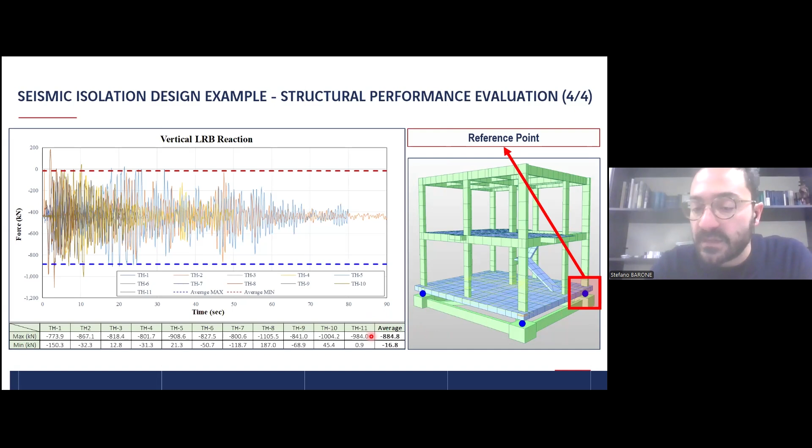So going to the conclusion of this example, and this is also the conclusion of the presentation, this is a conclusion that is valid in general for isolated structures. In this case, it was a building. The first conclusion is that a seismic isolation system is a very effective system that can protect both new and existing structures. I didn't mention that seismic isolation can be implemented also in existing structures. And also this protection strategy indicates that we can have a better and enhanced structural performance. Why? Because during an earthquake, the superstructure will essentially behave elastically.

The second point is that, as I mentioned at the beginning of the presentation, we will not have any damage during the earthquake, so we will not have any future repair cost implicated after an earthquake event. We can use the importance factor 1 for all risk categories, because if the structure is isolated, we can reach the same level of performance independently of the importance of the structure.

And this indicates, and this comes from statistics, that we can have a probable initial cost-efficient solution, especially for structures that are in risk category 3 and 4. So if I have to design a structure of risk category 3 and 4, meaning hospitals, bridges, the advantage that I can have by isolating the structure could be very important. It could be from 25 to 50% higher if I design the structure conventionally.

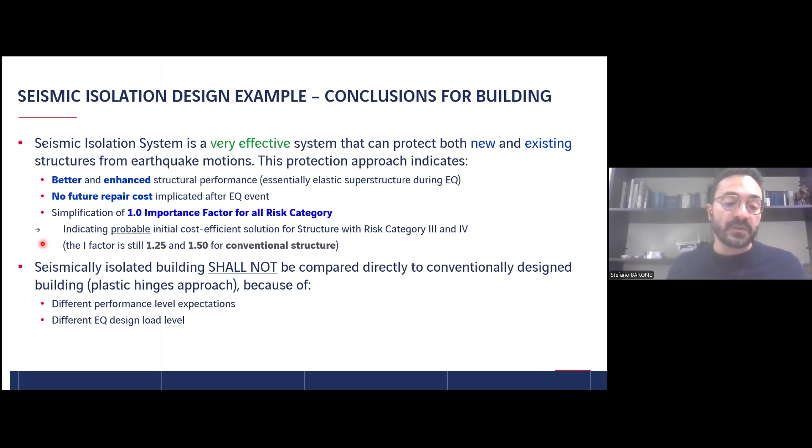And also another important point is that a seismically isolated structure cannot be compared directly with a conventionally designed building, or in other words, with a ductile system. Why? First of all, because if I design an isolated structure, or the same structure with a ductile behavior, I need to expect a different performance level. Second point, I am designing the structure with different levels of earthquakes. In fact, if I design my structure isolated, the structure is designed elastically, so to behave elastically up to the maximum considered earthquake.

The typical is the 2,500 years return period. If I design the same structure non-isolated, what I do is to design the structure for life safety, typically for 2/3 of the maximum considered earthquake. So that's why when we compare a seismically isolated building with a conventional building, we have to take into account that one building is ductile, the other building has the isolators, but we also have to remember that we are designing the two structures with two different levels of performance. So we need to pay attention when comparing different design strategies.

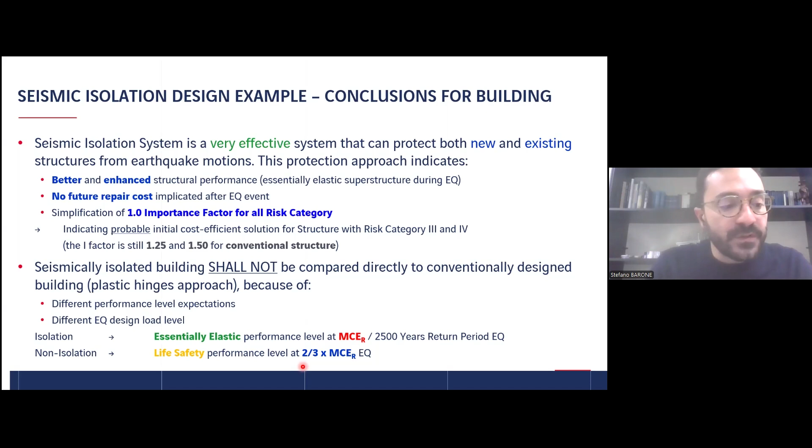So with this slide, I have finished my presentation, unfortunately a bit late. And so now let's see if we have some questions in the chat. I think yes. Okay, useful life we answered.

What could be the estimated cost of maintenance of this type of system and the periodicity of maintenance? Thanks, Luis, for this question. It's an interesting question. Typically, the seismic devices, so I mean isolators and dampers, are supplied with an inspection and maintenance manual. But think about it, it's more an inspection than a maintenance. So typically you have an inspection manual, with a specific program.

For example, if I remember well, for rubber isolators, you have like 5 inspections in the first 5 years from the installation, where you have to inspect the isolator to check if there could be some defect, if you could have some corrosion in some part of the isolator. So thanks to this regular inspection, that is again a visual inspection, you can monitor the isolator and check that everything is okay. But it's more an inspection, so it's not really a maintenance. It's an inspection that has to be done at a specific moment. It is suggested to do it after an earthquake to check that everything worked properly. But if after this inspection everything is okay, actually there is no maintenance.